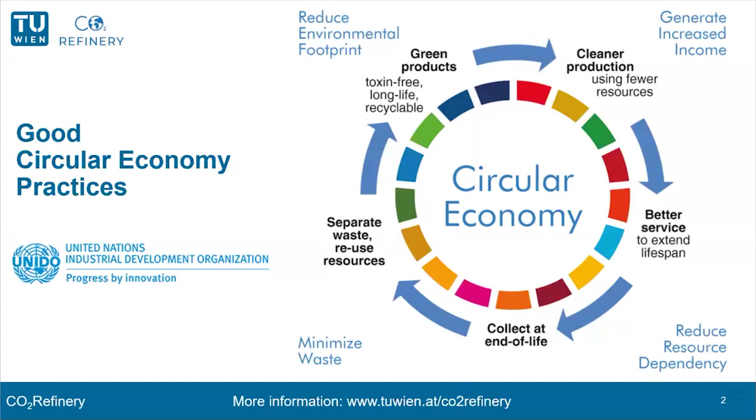Now climate change is discussed everywhere. 5 years, 10 years ago, it was a little bit different. I myself was participating in one of the COPs in Marrakesh, which was a follow-up of Paris. And then climate change and aspects there were still a little bit less noisy. Now it is noisy, but without any success, as we have seen also in Baku in Azerbaijan.

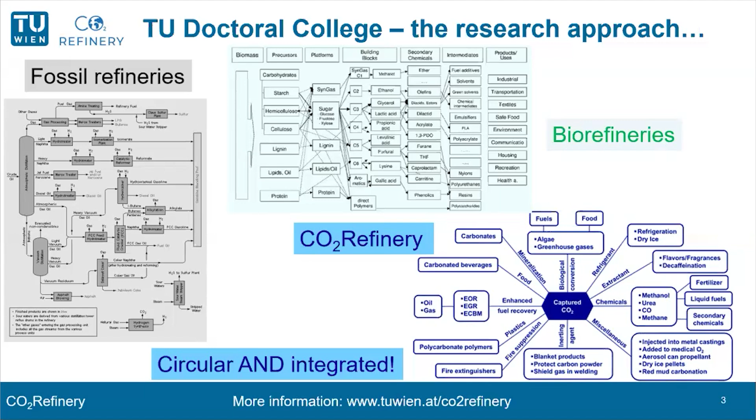In any case, coming back to the idea and the concept, the idea was really to have a transition from classical fossil refineries, biorefineries. There are lots of these concepts that are already quite well established, and then bring into that concept of a classical biorefinery, whether to produce fuels, organics, or protein, also the CO2 that comes maybe from a point source, or maybe in the future from direct air capture. This was not really a key topic; where the CO2 comes from, the CO2 is just there. So you develop here the technologies and assess them for providing us the CO2 stream in our CO2 refinery concepts.

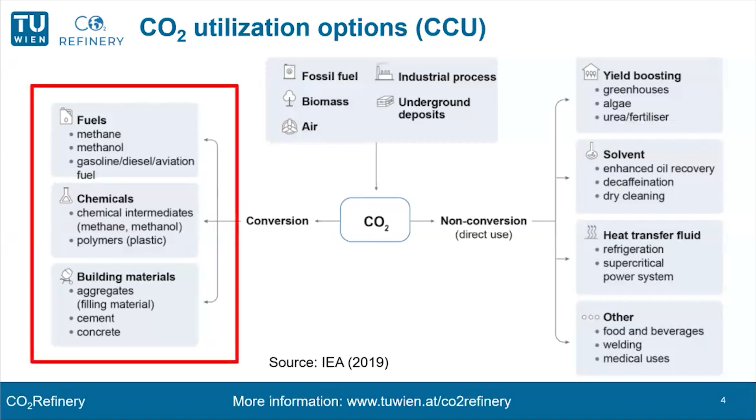The focus was also not on the direct utilization of the CO2, without a conversion, in a couple of applications that one could do, but rather to look at conversion into fuels. Methane was a topic, methanol, other fuels, chemicals, and also the production of proteins via microbial or biotechnological processes. So the focus was on this, and that was actually also what I pitched when we wanted to get this project and tell this story: utilization of CO2.

Now there are regulations. We heard about that. And what is really CCU by definition? How long is the carbon stored, etc.? All these topics were not so much addressed, but rather what would be a feasible technology. And we wanted also to go towards new ideas. I will show you a few of these in a minute.

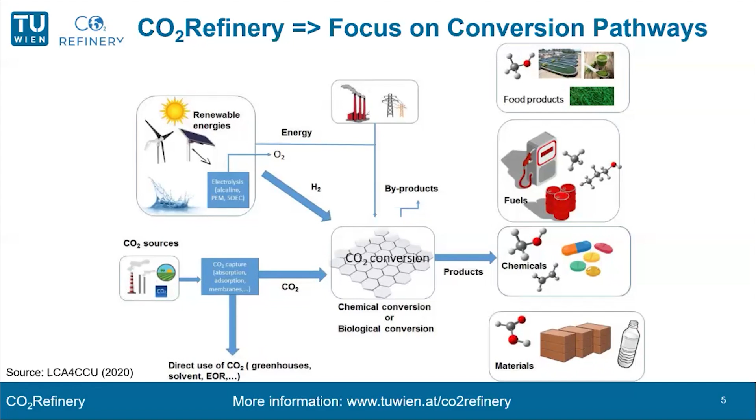But there was also one aspect that was important for us in the CO2 refinery concepts that we filed for this PhD program: aspects of scalability. I think that's always important, when CCS technologies can be scaled. I have seen today also the concepts, the classical amine absorption concept, and also novel concepts that are large scale. For CCU, or for the utilization of the CO2, and in particular innovative solutions, the aspect of scalability is still to be proven. And so that was also one of those aspects in choosing a suitable technology.

Competitiveness, another aspect: is such a scheme marketable at all at an acceptable cost? Or could we get a bankable investment from it? Things like that. And of course, also this aspect of climate benefits. There was an earlier presentation today by Ada on LCA. So this topic, of course, is also very, very relevant.

There's one thing that I wanted to also note, and that is CO2 is a dead molecule. So the activation of CO2 requires energy. That energy can be electricity, or it could be also a reducing equivalent. And these reducing equivalents are mostly hydrogen. And when we look at the costs, what it will require actually to be scalable, to be competitive, is really having a compatible and a competitive hydrogen price at some point.

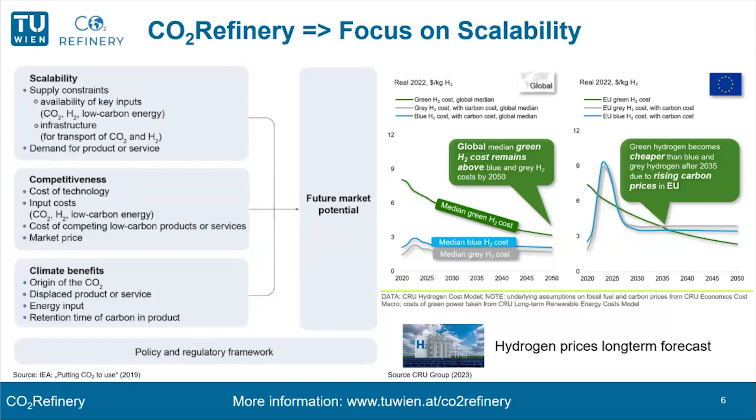So this is kind of just the systemic framework and aspects that were related to the idea of our doctoral school. Now I briefly introduce you to what we really do in this school, and first of all give you some key facts. It's a school of 10 PhD students. They were funded for 48 months, and we started in May 2021, and it goes all the way to April 2025. So most of the PhD theses are at their end. So it's now harvesting season with publications and research output.

We involve 10 different research groups with 6 different institutes and 3 TU faculties. So it's not only the Faculty of Technical Chemistry, where you're located today, and where Stavros and myself and our teams belong, but also the Faculty of Electrical Engineering and the Faculty of Mechanical Engineering are involved with PhD theses too. We have 10 PIs, and here the idea was also to involve younger PIs who have not yet received their tenure, tenure track PIs, young ones, with their crazy ideas.

And one of these crazy ideas was really to educate in this doctoral school one carbon engineers. So this one carbon technology was one of those ideas where I said, okay, let's convert CO2 to methane, to methanol, to formaldehyde, which are feedstocks for further conversion at some point. And we brought this together in a scientifically excellent scheme, but also with an interdisciplinary education where the TU Wien doctoral college support is strong, and furthermore with a balanced, quite diverse faculty.

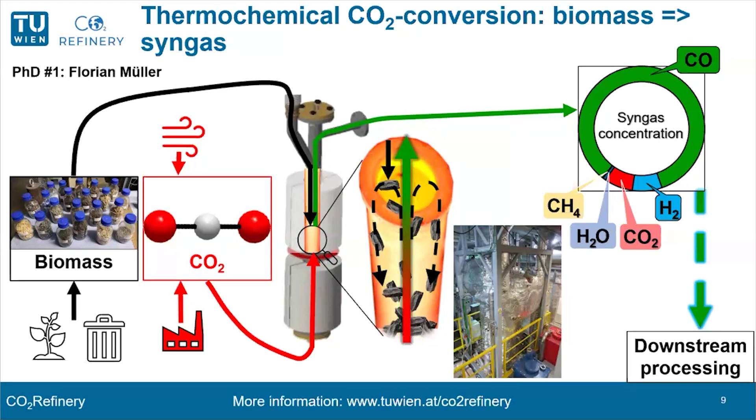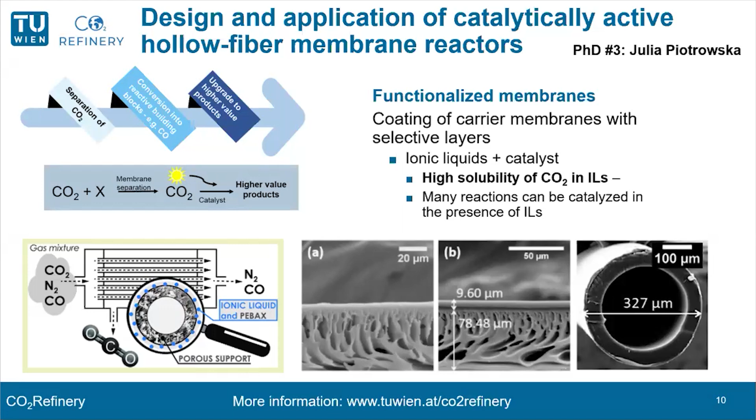So actually to have a membrane reactor that takes the CO2 and produces an interesting intermediate, and this intermediate is CO. And as you know, also from a toxicity point of view, that's quite interesting, because if you utilize the CO, for instance, to produce chemicals in a second step directly, it has some advantages in this context. The advantage of CO2 solubility in ionic liquids is one of those points that we actually looked at here.

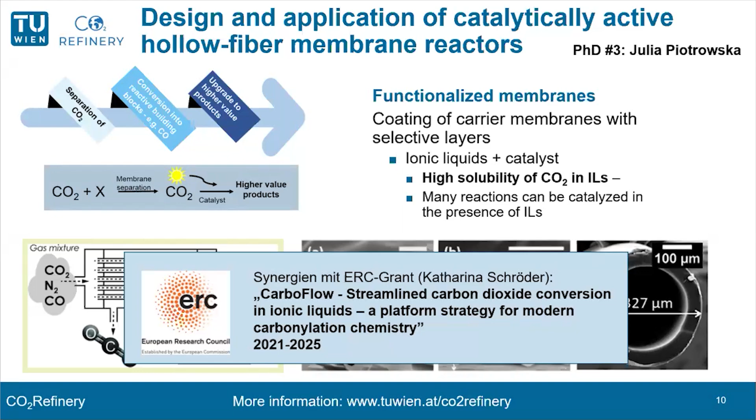And this is also a project that goes in parallel with a couple of other works. The PI is Katharina Schröder here at TU Wien from the Institute of Synthetic Chemistry. And she received an ERC grant, which is called CarboFlow, so streamlined carbon dioxide conversion in ionic liquids. And we coupled this together, and there are quite some very nice and interesting outcomes now. So we have our first operating, up and running membranes that can actually do this job at TRL, let's say, 3 maybe.

Another one is this one here. It's by Gustavo Andrade Silva Alves, PhD number 5. In his research he works on new catalysts, and as you may know, the conversion of carbon monoxide or carbon dioxide with hydrogen to methanol is an interesting and really a large-scale industrial topic. And everyone could say, okay, well, I just go there and buy the catalyst because it's there, it's commercial.

Here, the concepts are in particular to look at new ways of catalytic activity, in particular for the direct utilization of CO2. You could, of course, convert CO2 by the so-called water gas shift reaction to carbon monoxide in the first place, remove the water, and then go with hydrogen further with the classical industrial process of methanol production from fossil carbon sources, typically.

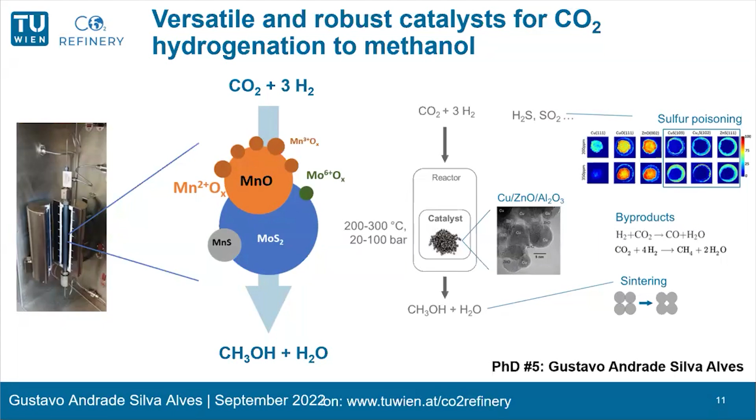And the interesting aspect here is that molybdenum sulfide is a very nice ingredient in this catalyst, and this research actually results also in a parallel work which even targets a spin-off, a startup of TU Wien that strengthens this idea. And there is also commercial interest in that topic.

Biotechnology is also part. We have 2 biotechnological PhD theses in this set. So actually, to take CO2 and get microorganisms that can convert it to products, maybe with a pre-reduction conversion into syngas, and then to get formate or methanol, which can further be converted into valuables. What is required here is what is called gas fermentation.

So you need microorganisms that actually can metabolize the carbon monoxide and the hydrogen in a bioreactor, with the challenge that carbon monoxide and hydrogen are usually gases that have very low solubility.

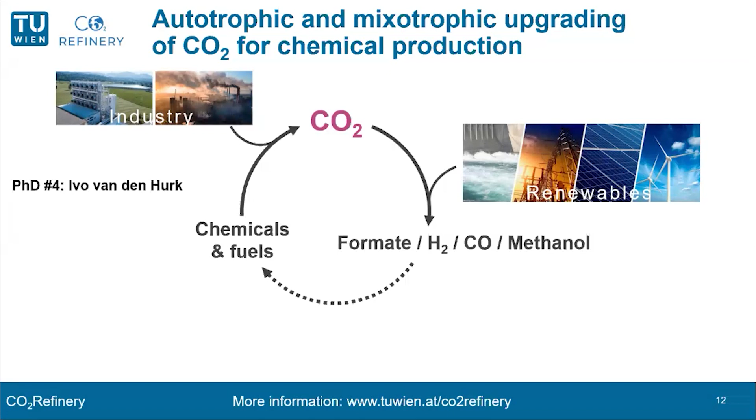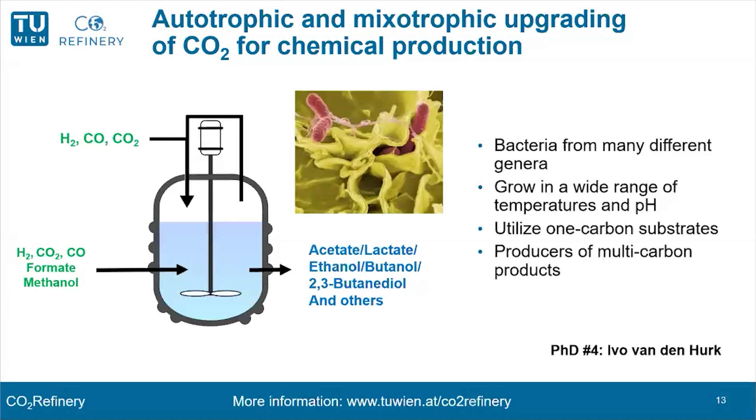So these are pressurized reactors that are required, and they can do it. And also here we have a good synergy with an FWF, what is called a Starting Grant, which is run by Stephan Pflügl, and that also supports these activities. So this is just another picture that shows these ideas. Here, target molecules are acetate, lactate, and also alcohols in this project.

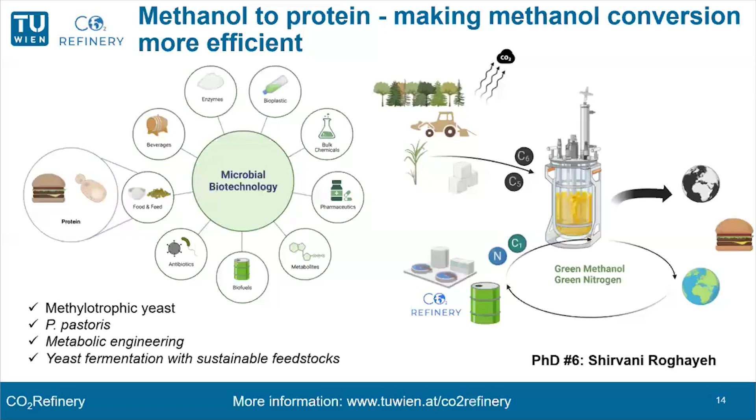Proteins, very shortly. Microbial biotechnology is a set of technologies that could also utilize CO2 in a good way, or take the methanol and metabolize it towards single-cell protein. So the formation of single-cell protein from a CO2 source could also be an interesting aspect, and that was brought into this project.

Methanation, I won't tell you so much. It's actually an old technology, but the new part was really to utilize a new catalyst. Production of methane can be done from hydrogen and carbon dioxide, or hydrogen and carbon monoxide, via the Sabatier reaction. And this was also put into the pilot.

Here you see our pilot facilities, which are downstairs, where we have a 100 kilowatt gasifier that can be connected to a conversion into methane in a fluidized bed. And classically, Sabatier reactors are usually very exothermic. So the formation of the methane produces a lot of off-heat, so usually you need a couple of reactors to have the full conversion.

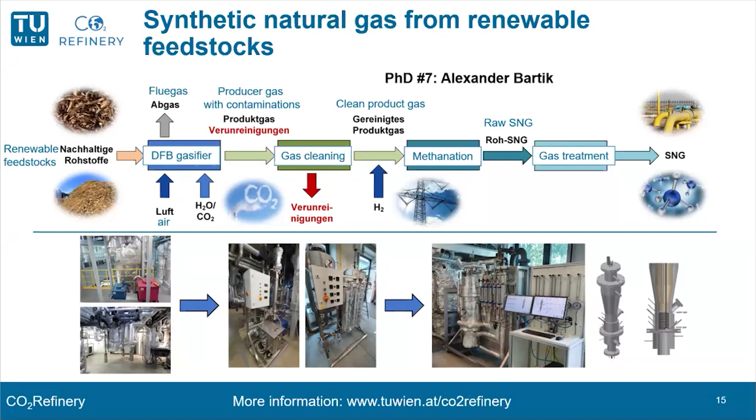And here the idea was a cooled reactor in a fluidized bed, so that we always operate at the sweet spot of the kinetics in combination with the proper thermodynamics. This was one of those projects. Also here, the catalyst was produced in-house in cooperation with Gustavo's team and Karin's team. That was also quite a nice topic.

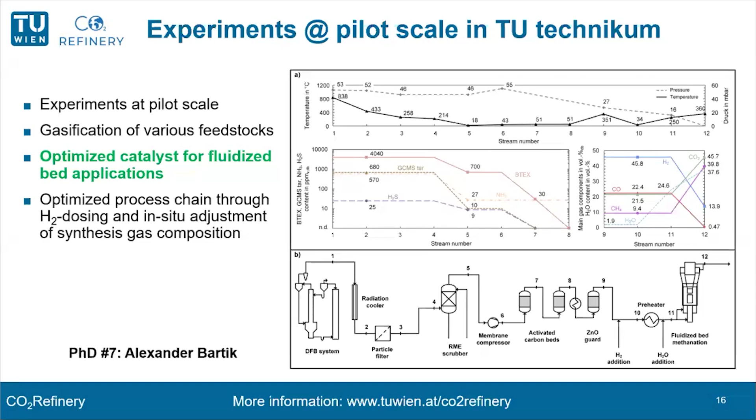The way it works, no details about the whole process chain from the fluidized bed system to ending up in a methane stream that can be utilized. The supportive PhD thesis in area 3, shortly addressed here. This is a very nice one, with our team in inorganic chemistry, and that is to produce new catalyst carriers. That was also one part.

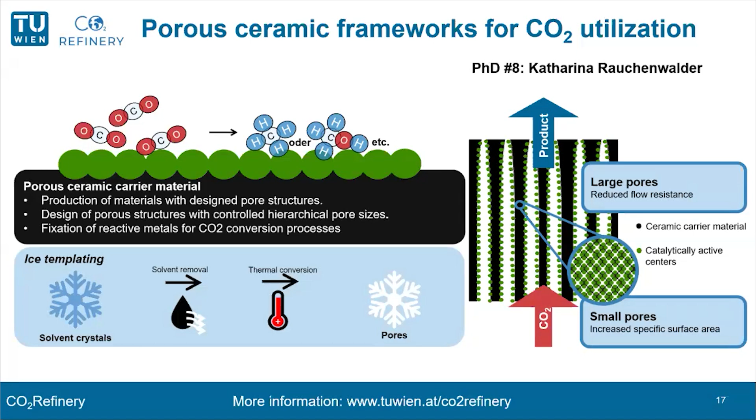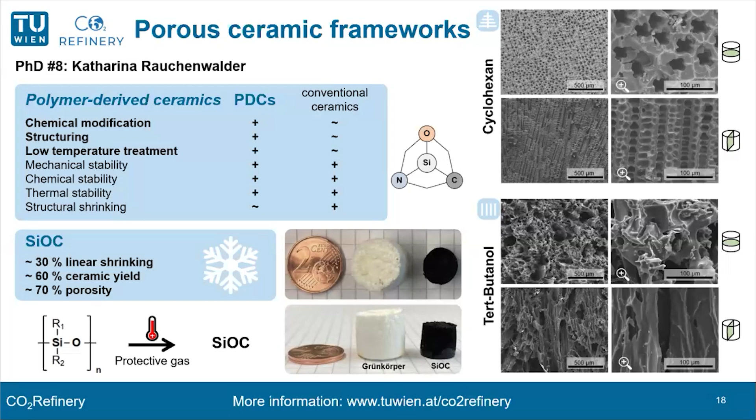One might say, okay, what has this to do with CO2? But it's quite an interesting topic to produce a catalyst with a controlled pore structure, by using the crystallization of solvents with a precursor for the formation of such ceramics. And you see here the structures that can be produced. So it's low temperature formation of precursors that are then heated and converted into such carriers. And there were quite some successful applications of these carriers, both for the biotechnological conversion and for the methanol projects.

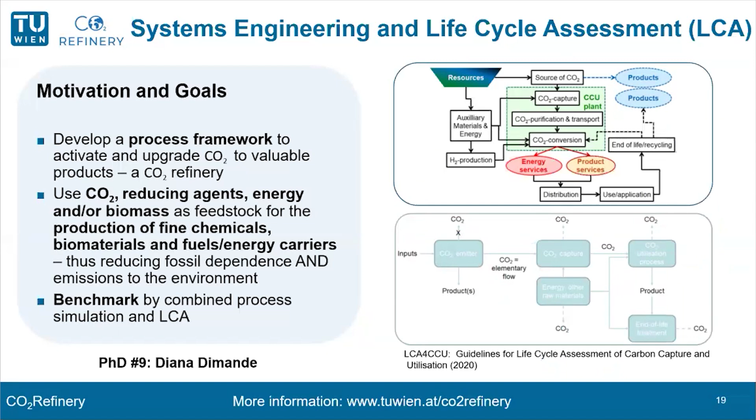The last one that I want to introduce is this one here. That's an LCA project, but you can ask Diana, who sits here in the back, and she can tell you more about the progress. It is looking at various process chains via LCA and giving them a rating, with the challenge that we are at very low TRL at the moment. So it's almost like an ex ante approach that might be required.

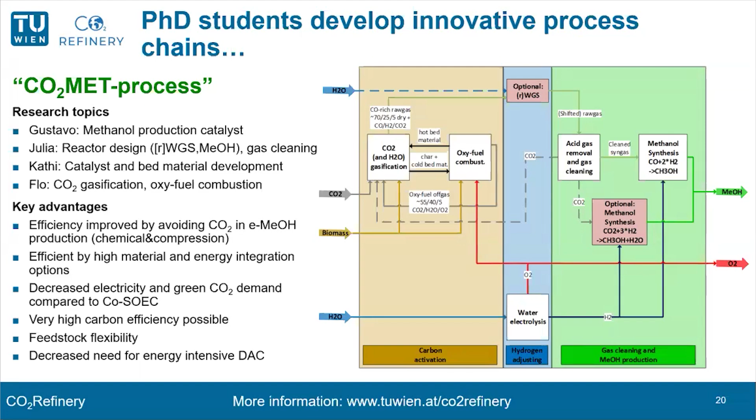What we also have is working together. One of the interdisciplinary ideas in the CO2 refinery doctoral school was to develop process chains. And this gives you an idea of one of those, called CO2 MET, where gasification, the best new catalyst, and reaction engineering were combined into methanol formation.

A short outlook on aspects that I think are also important, and that you could comment on and criticize: in the CO2 refinery doctoral school, we do not have any electrochemistry or electrochemical conversion. We considered this an associated topic. We had only 10 theses, 10 topics to decide about. And of course, the formation of methanol, carbon monoxide, formic acid could also be attractive in electrochemical processes, as well as the formation of ammonia, for instance.

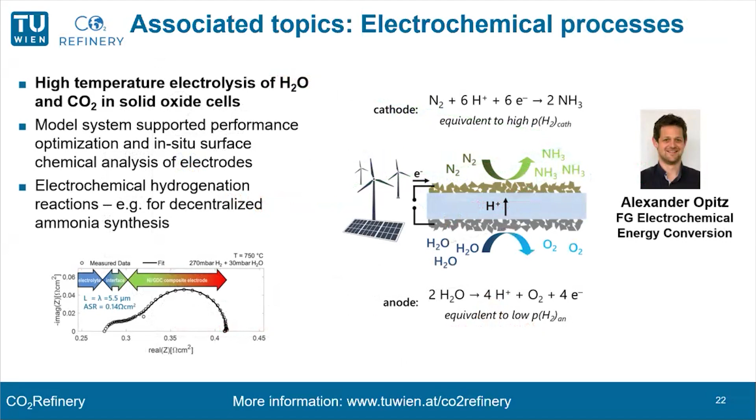And Alexander Opitz here at TU Wien is an electrochemist, and he develops processes where the formation of ammonia, for instance, is an interesting topic. So I believe that there is more to come with this associated PhD thesis, and with this, I try to close. I'm out of time already.